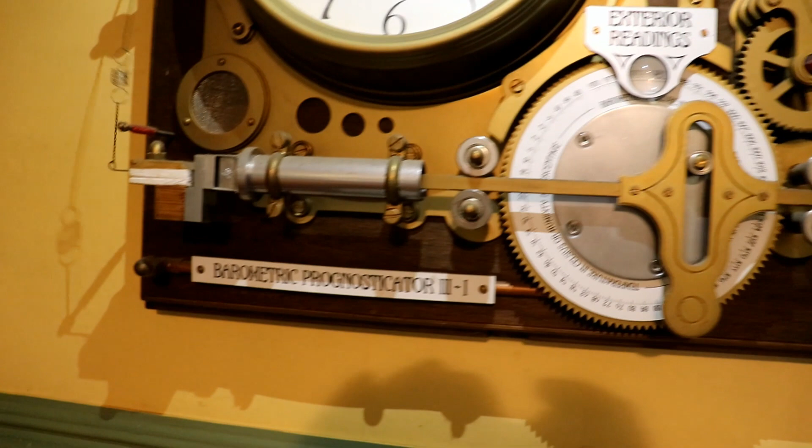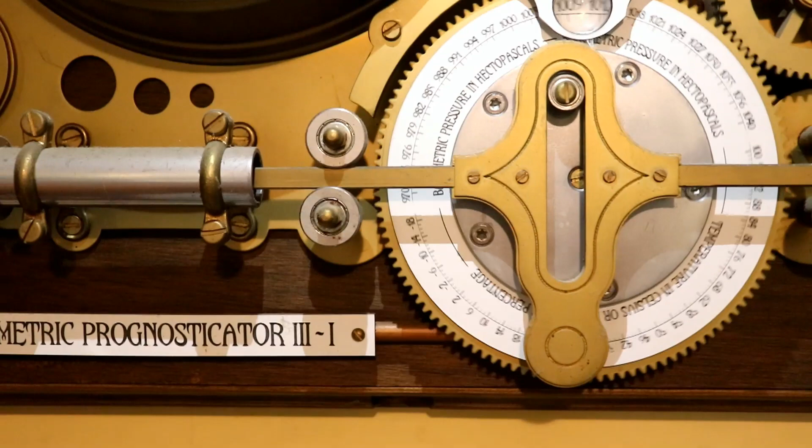Now, if you've watched this channel in the past, you'll know that so far on my machines I have used, well, the barometric prognosticator 3 was the first musical one. That has got a bell that rings to signal the hour changes, and when it's displaying readings, what reading it's actually displaying. It's also got the flute, the first flute, which was off a cuckoo clock. It uses the bellows from a cuckoo clock to make the wind, because obviously no cheating, Steamhead, no cheating. If you can have a sound, it has to be made for real.

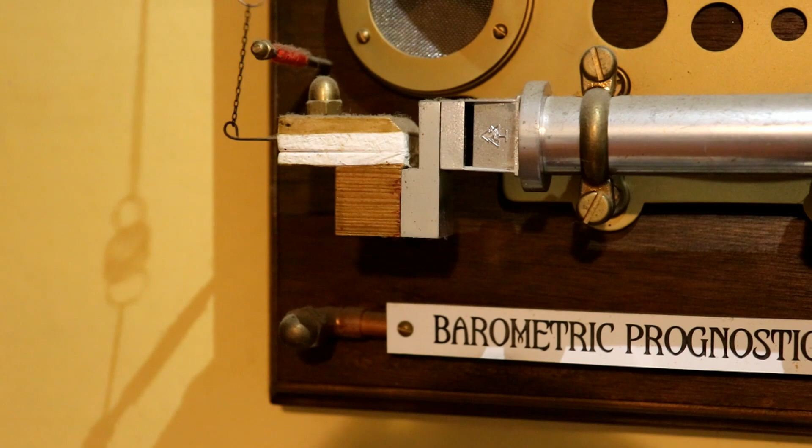And then it's got a Scotch yoke that pulls the sort of swanee whistle style mechanism in and out to set the pitch. And that works really nicely as it plays the weather forecast back to you audibly, musically, each hour or when required. You can actually hear how, for example, the humidity or the pressure or temperature has risen, fallen, whatever, throughout the last 24 hours. So, two instruments, bell and whistle.

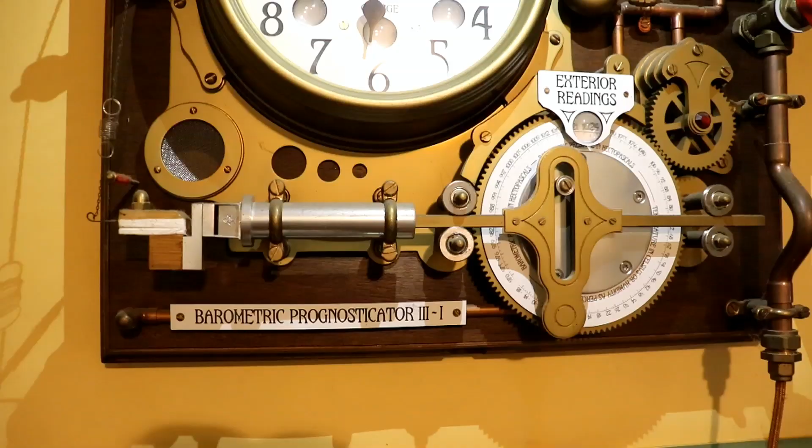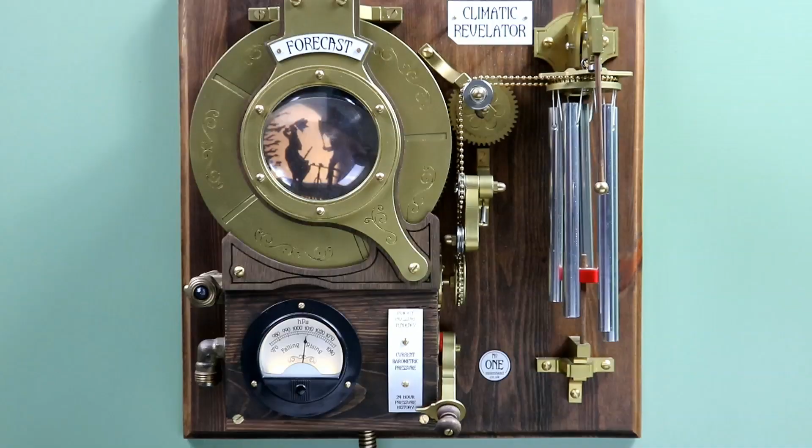And of course, who can forget, as I did this morning whilst walking the dog, there's the trumpet from the Net Throbwell, the heraldic clarion door horn, which is a sprayed up vuvuzela from a brilliant company in Spain. And there's the Climatic Revelator that displays the weather forecast by ringing chimes, a circular ring of chimes with a hammer, which is another good potential source of music.

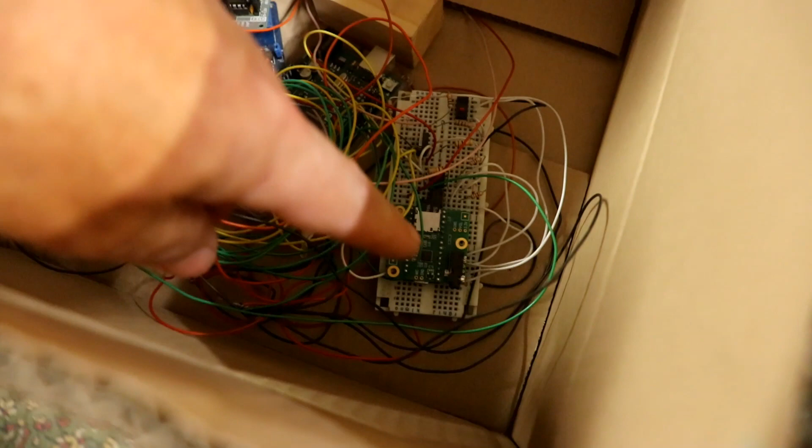And of course, there's Victoria the automaton. The other element in the music machine could be a singing automaton. There's no reason why Victoria couldn't sing, because having figured out the Teensy soundboard, which was amazing, and live filtering to make input sound have wow and flutter and crackles, there's no reason she can't sing, and that would be a lovely addition to any steampunk music machine.

So let's start this, and I'll stop filming myself. I'll just show you some of the sketches I did on holiday, some of the ideas that came to mind.

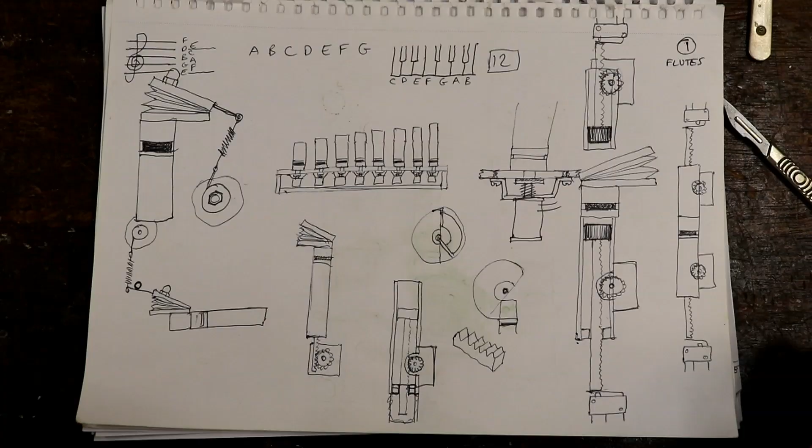So here's the first idea, thinking about keyboards and notes. There's some sort of representation of the one on the barometric prognosticator with the flute and the bellows, springs and motors.

Then getting inevitably more complicated, thinking possibly about having a row of them, rather like an organ, a church organ, with solenoids under each one, a valve, so that you can play lots of them together, which makes quite a lot of sense.

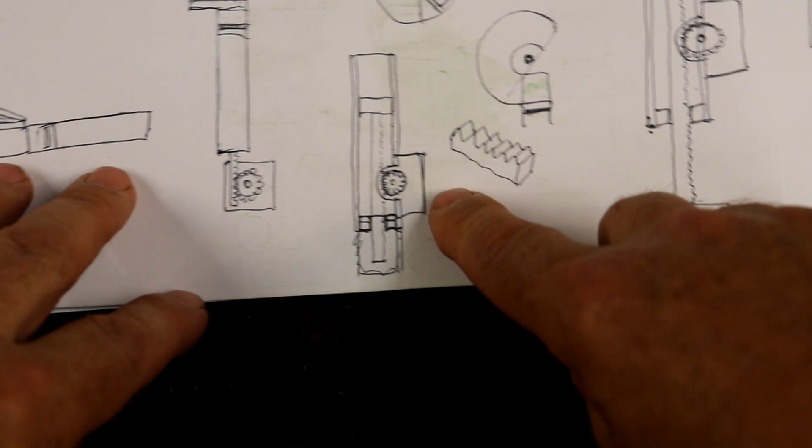And I was thinking, well, rather than having that Scotch yoke, you could have a plunger inside with a rack and pinion. Sounds like a good idea. Something along the lines of that.

Now, the great thing about that was, or is, if you had several of them, you could then be setting up the pitch on one while another one was playing.

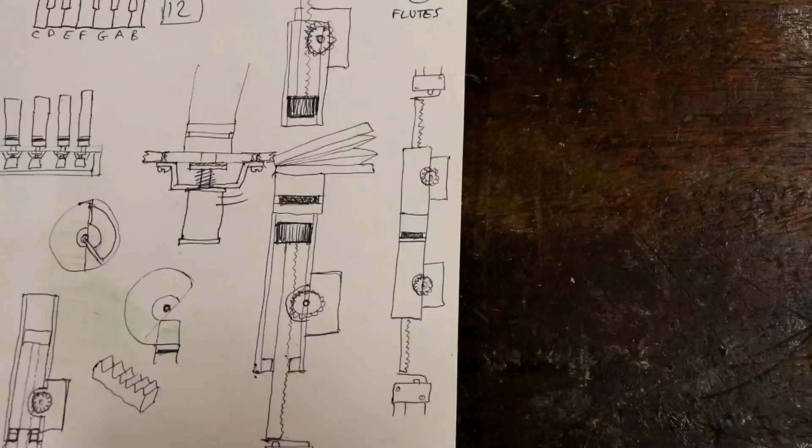And I was thinking, well, the other thing about bellows and flutes, here's one I didn't prepare at all. So there we are, beautiful little bellows and the flutes, they're all the same as far as I can see, because I bought lots of them.

The difference is in this wooden block, which has got a hole drilled up the middle, which sets the pitch. But I have noticed on the lower notes, on really big cuckoo clocks, these bellows are actually much larger because they need more air to make the notes.

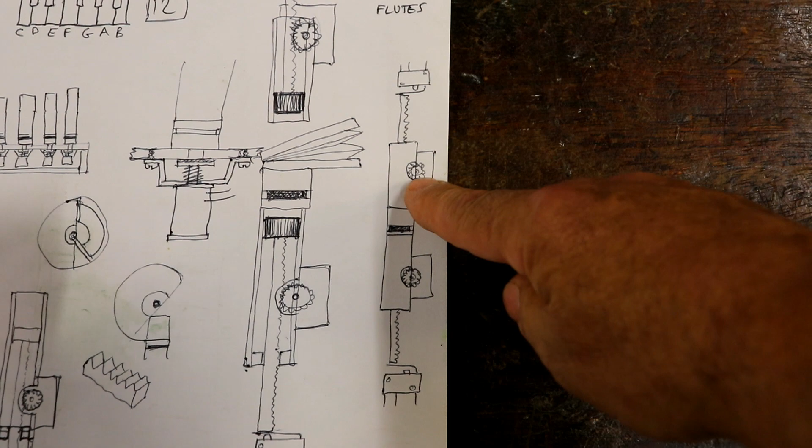So the thing is, if I had it like that, then I'm going to have adjustable bellows. And I thought, well, I can make bellows by having another motor driving down a plunger, a bit like a piston or something. So you have a motor at the top, a motor at the bottom.

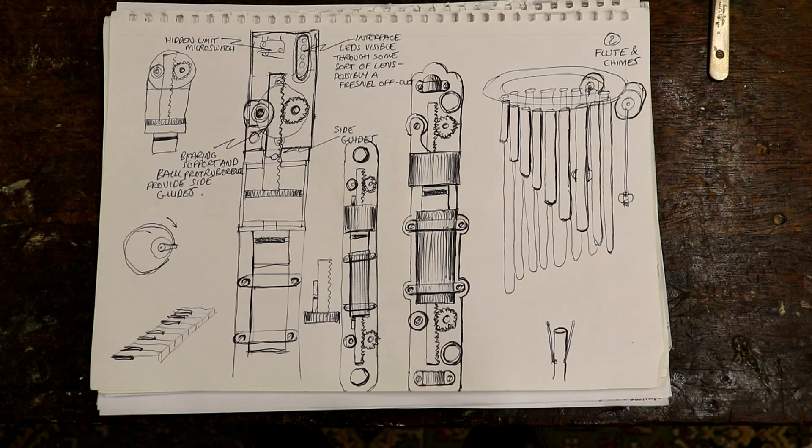The stepper motors I usually use, hold on a minute, these ones, which I've used in all the machines because they're brilliant. 5 volts. They come with an interface board that you just plug in, so you can connect it directly to something like an Arduino, which has a library you can use to control them.

And they're geared down a lot inside, so they're not fast, but they've got a lot of torque, very powerful, and very, very accurate - I think it's something like 2,000 or more steps per whole rotation. So very accurate, so they'd be very good.

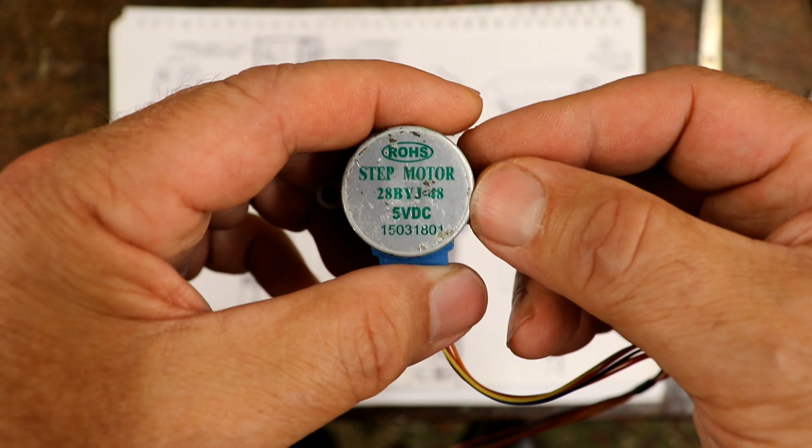And I always forget to read the number of these because people regularly ask. It is a 28BYJ48. There you go, recommend them.

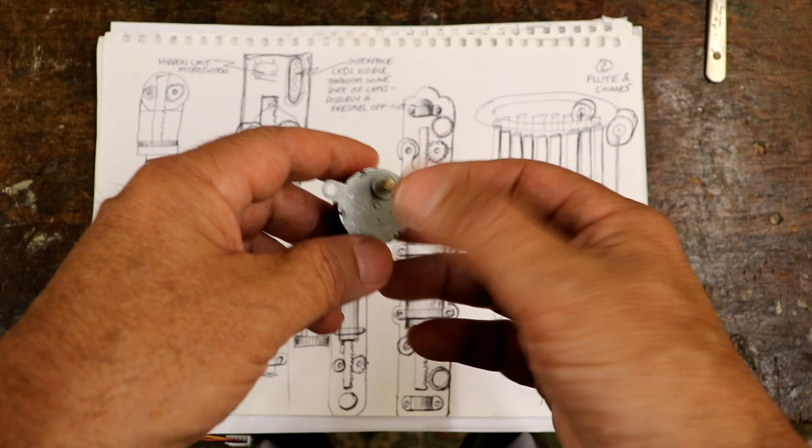They're slow though, so I was thinking, well, how slow? And when I got home, I looked it up because I hadn't got any internet access. They go maximum, I think it's about 4 seconds per revolution, which is about 15 RPM. Very slow, so I don't know whether that would work.

Oh, and I mentioned the chimes on the Revelator - the idea of having 2 hammers on motors, one inside, one outside, that can both turn independently, so they can be setting up the next notes while the last one's playing.

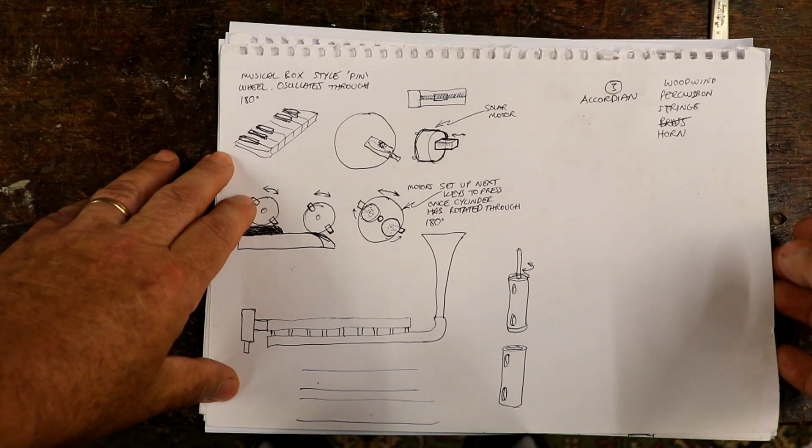Another idea, what was this? Oh, the accordion. I remembered I'd bought bits of an accordion, and I was thinking, how could you get a keyboard to be played without dozens of electromagnets? And I thought of an even more complicated way.

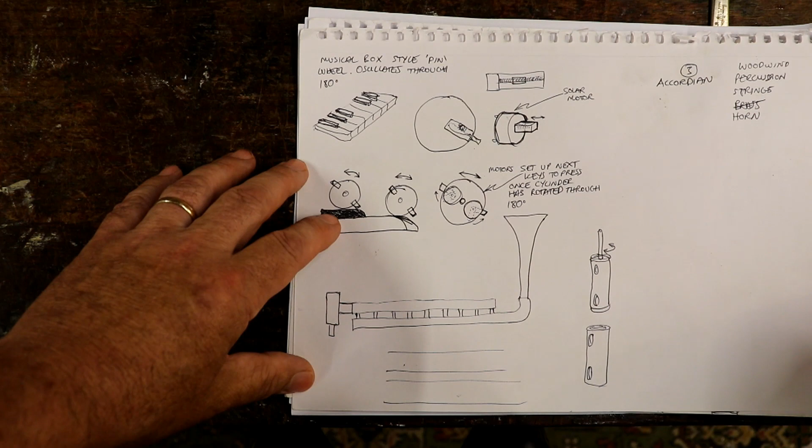You could have a cylinder with lots of little motors in that would throw out a pin, a bit like the works in these lovely little music boxes. We have a cylinder with these pins, and as it rotates, just need some oil, it plucks one of these little tuned things, whatever they're called. It's a bit like that.

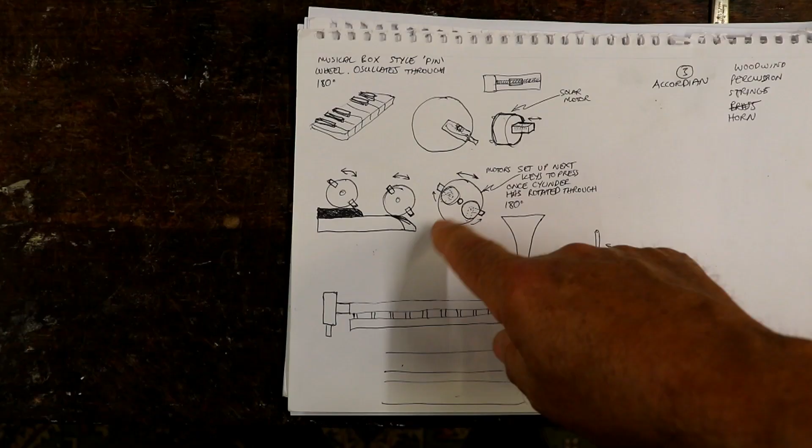With little motors, they flip out a pin. There'd be two lots of them, 180 degrees from each other, flipping out the pin. They'd roll round and engage with the keyboard, and meanwhile the other one would flip out or flip in, and you'd have a whole row of these, if you get my drift.

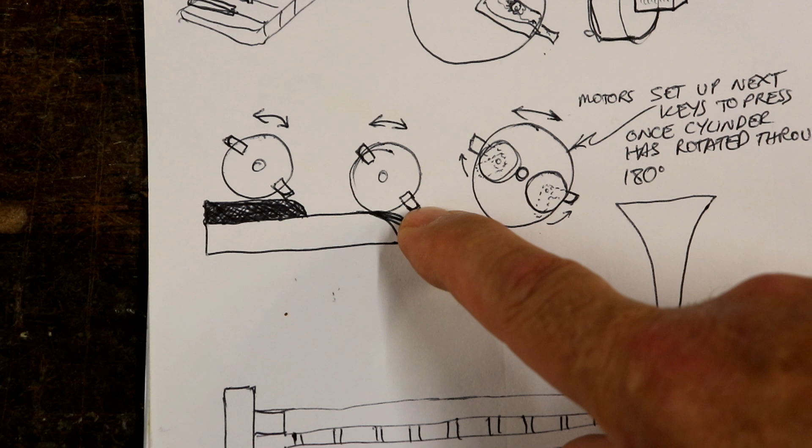The nice thing about it is that these pins can be on very, very small motors, because there's no effort needed there. The force to actually push the keys comes from the whole cylinder turning backwards and forwards.

When I got home and dug out the accordion I'd got, what did I discover? Keys, mechanical valves. But whoever sold it to me on eBay wanted to make as much money as possible, so they took out the reed boxes and sold them separately. So there goes that idea. Great shame, I'd still like to do something like that, but it's annoying.

This is where I became completely preoccupied with one of these - nicely in tune, a ukulele - because I remember my kids had got them and I thought that's really nice. All you need is some way of holding the strings down at the different fret positions, and some way of plucking the strings.

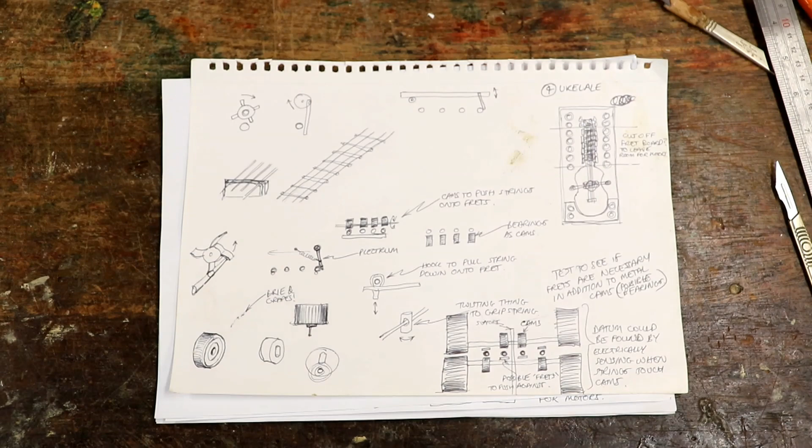What could be simpler? Well, three or four weeks later I can come up with quite a long list of what could be simpler. But I started off...

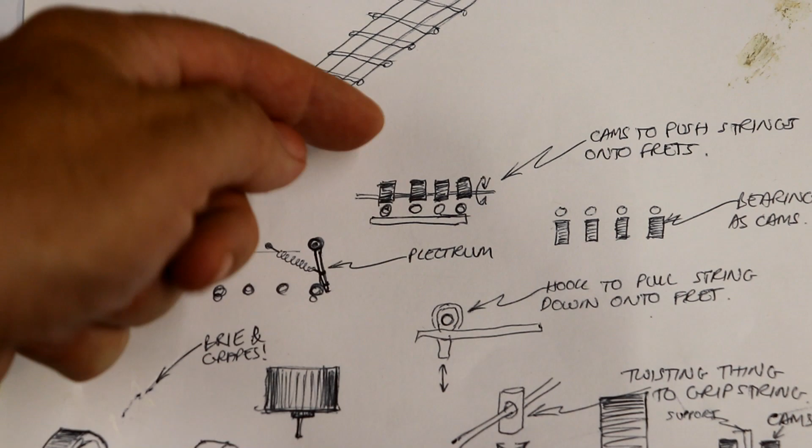thinking about having rows of bearings, eccentric ones that could come down onto the strings, like that for instance, and then you could have them all arranged nicely with the interfaces with the little motors under there. But of course those motors go slowly.

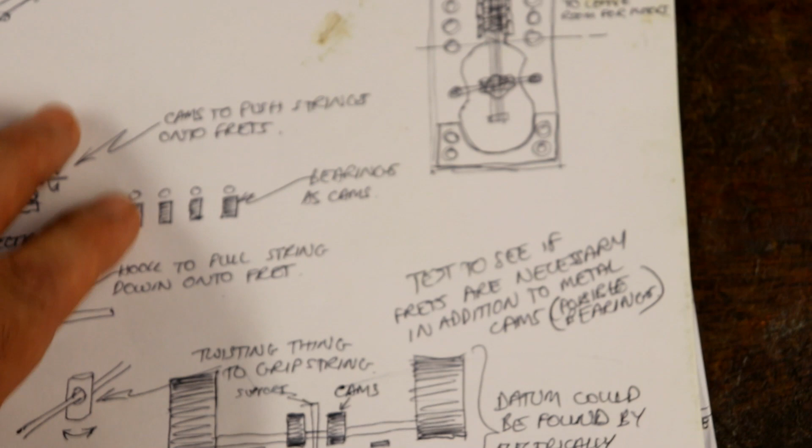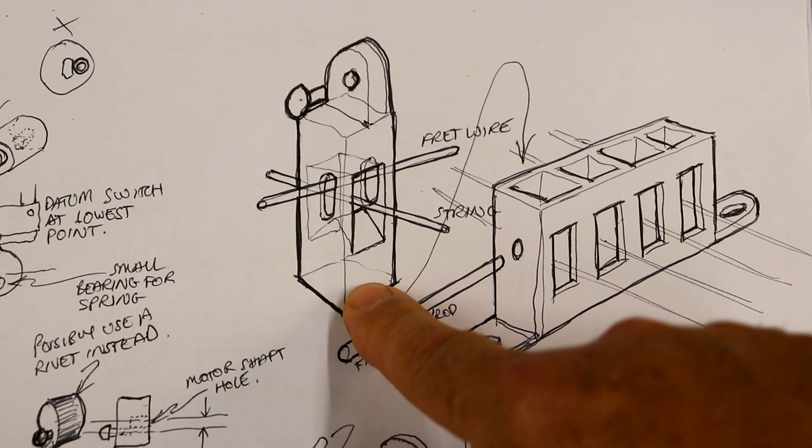Possible, those, possible. So then I thought, well, how about having individual little things or groups, clusters of things, with a big motor at the top - a stepper motor - on each one, and then have something inside that can lift up and down to hold the string against a sort of built-in fret.

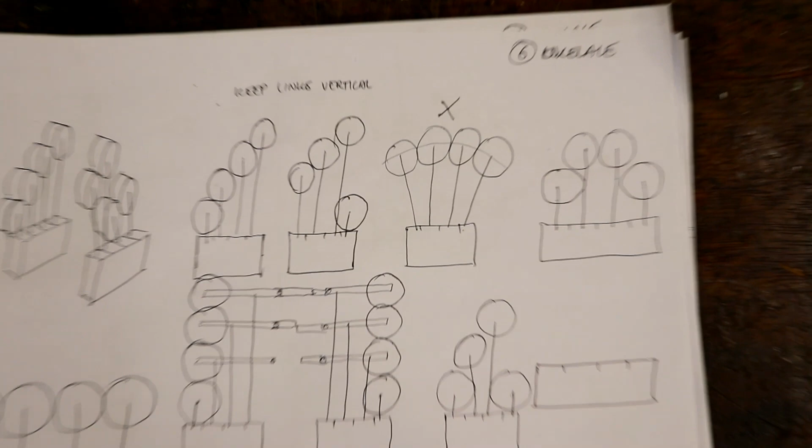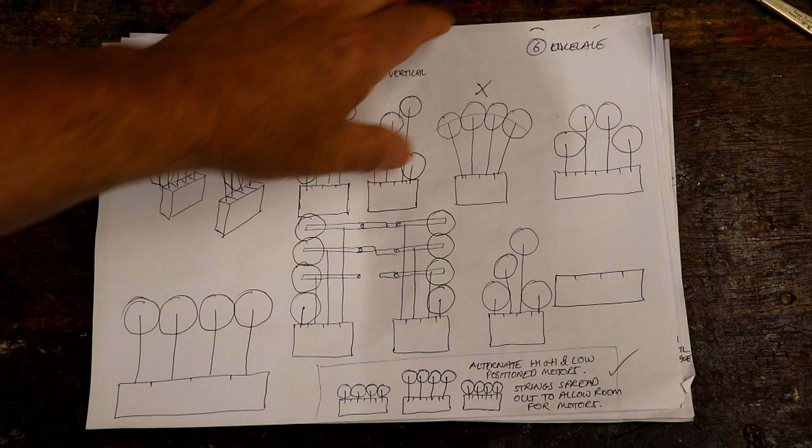That could potentially work. This is the problem with design - it's a curse and it's a joy, because the curse is there are so many ways of achieving something, not just one way. There inevitably will be the best way that someone can think of doing it at the time.

But then the joy is that you can sit on a beach listening to the sea and the waves, and just imagine in your head a multitude of different ways of achieving the same thing.

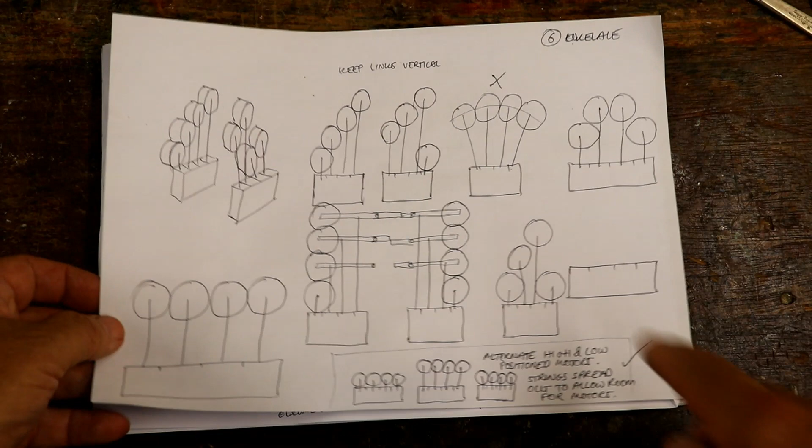So, trying to work out how to fix a load of these motors, enough for each of those frets, that really ruled that out. It's another nice idea for how you could achieve something else, which I can't even remember.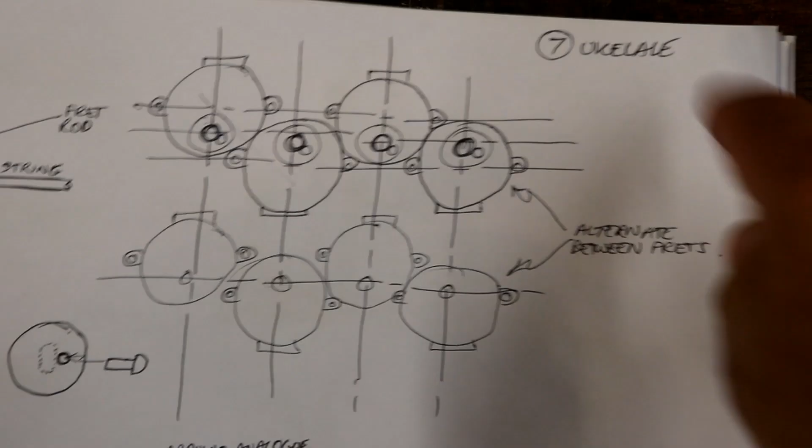Oh, and then, if the strings were wire - and you can, because I looked it up, get wire strings for a ukulele. I can't spell ukulele, I spelt it differently on each sheet, just hoping I'd finally get the right spelling.

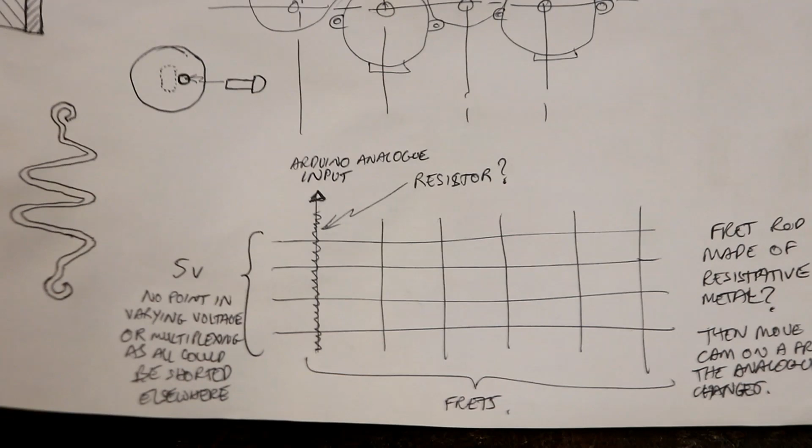But you could have the frets made of some resistive metal, or even have little gold-plated loops under each one, and then the strings, if they were metal, you could tell when each string was actually touching the right fret. Oh, it just drove me to distraction.

And then other ways - Bowden cables like you have on bike brakes. There's no end to it. More ideas. And then this is the final one.

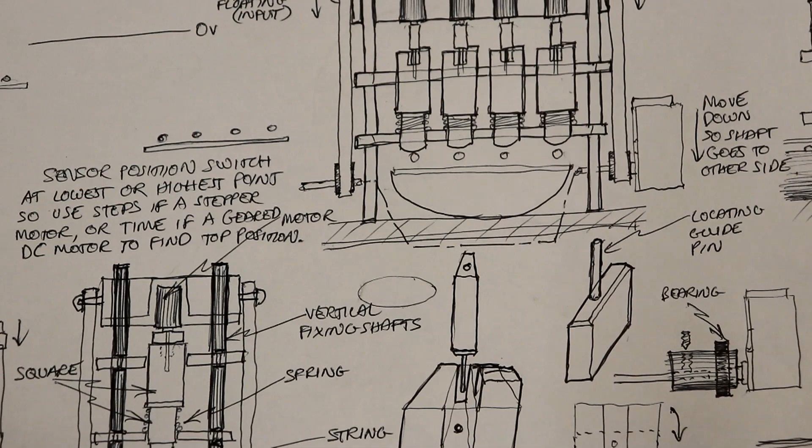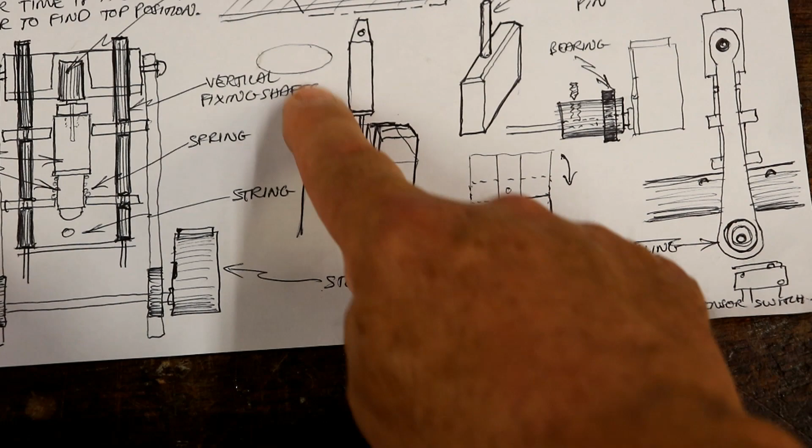That's it. The last idea I came up with was having four of the titchy little motors, a bit like that idea with the accordion, that could spin round little pieces of plastic that could be 3D printed, and they could then push down, engage, if you will, a bit like that. If they're lined up that way, they'd push down into the slot. If they're 90 degrees, they'd push this whole thing down, with a little row of springs. And then the whole of this assembly could be pulled up and down with one of the small motors.

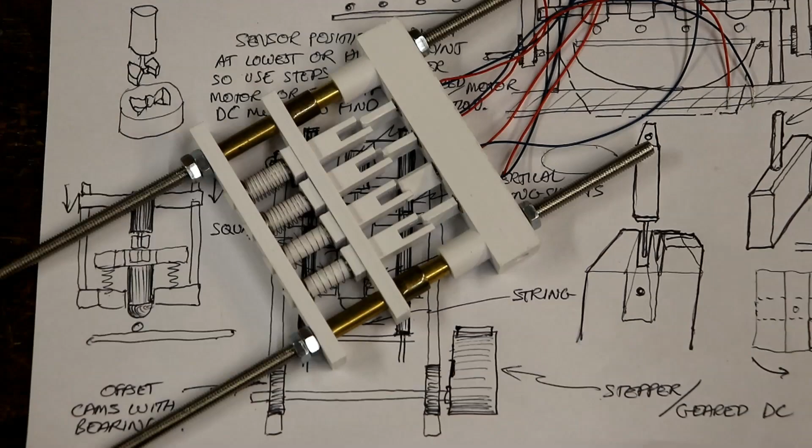So, with the benefit of hindsight, something very much like that. I finally summoned the enthusiasm to actually start making this.

Now you can see what I mean. I found these incredibly small motors, and I assure you my hands haven't grown enormously. They are, what do they call it, coreless motors I seem to remember. I didn't even know they existed.

You have a permanent magnet in the centre, and an epoxy-held complicated coil around the outside. That's why they're used on drones and things - there's so little momentum or inertia needed in the bit that spins round that they can go incredibly fast. Now, I don't want them to go fast, I just want them to turn, but the idea is they can flip something backwards and forwards really quickly.

So there are 4 of those fixed into here that can flip these little bits like that, or like that. Because of the design of the top of these parts - I haven't come up with any names for them yet - these are captive, so you flip that as far round, say clockwise, as possible. It can't go any further. It means that when you lower this, it doesn't engage. See what I mean? But if you flip it through 90 degrees, it's going to push that down.

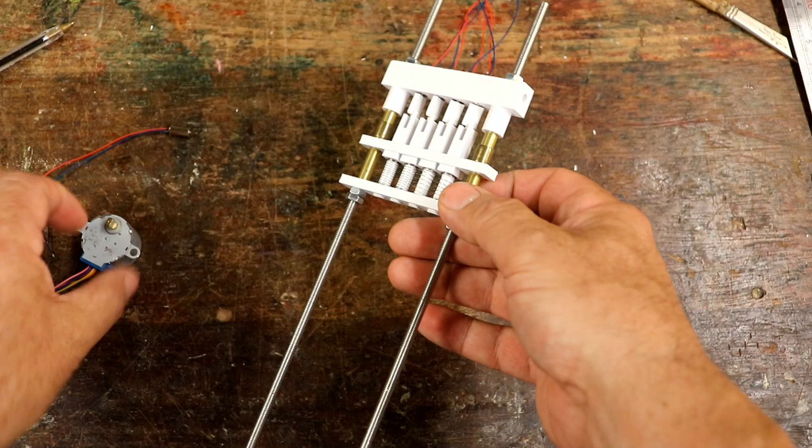Yes, it could work. Yes, it ticks the overcomplicated way of achieving things with steampunk. But, don't know, tell me what you think. I'd love to know - should I pursue this idea?

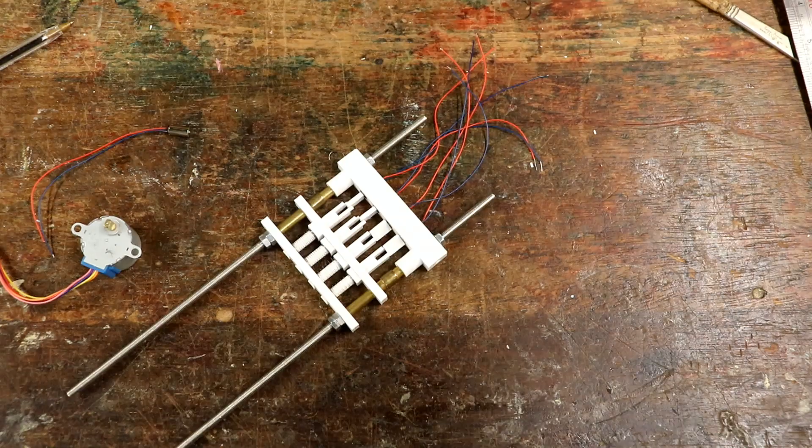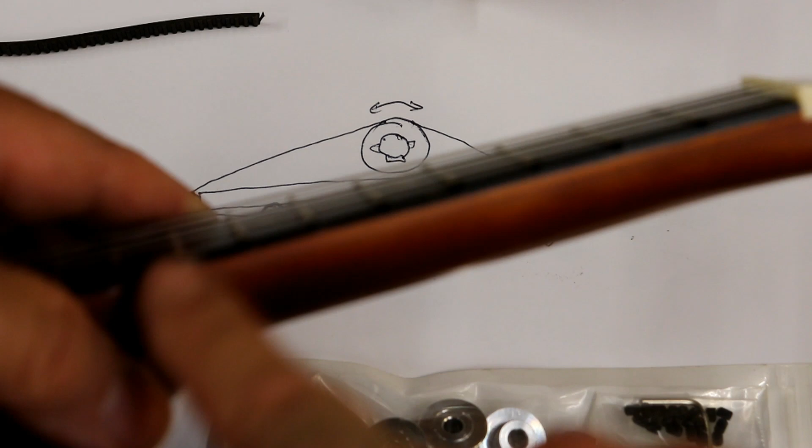Because this morning I came up with yet another idea. Forgive the high quality rendition, but this is the realisation. There's the side of the ukulele, that's this bit with the frets up there and the strings. You could have a roller, possibly with a rubber shield on the outside, a rubber tyre, and that can roll up and down these. Because it's rubber, it will sort of lift over each of the metal fret things, which would be great.

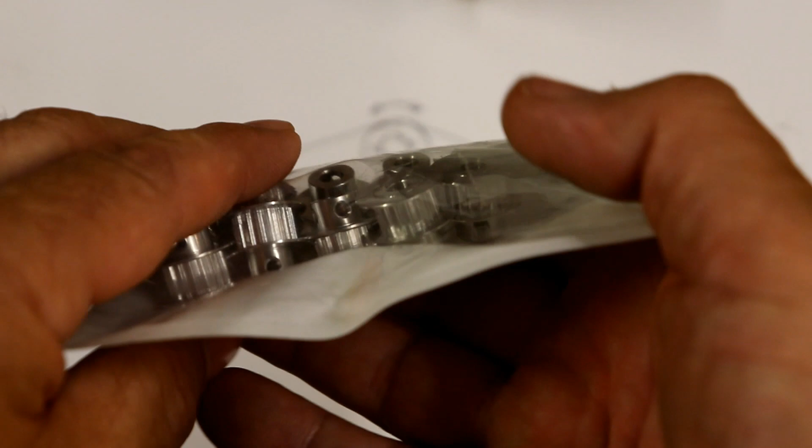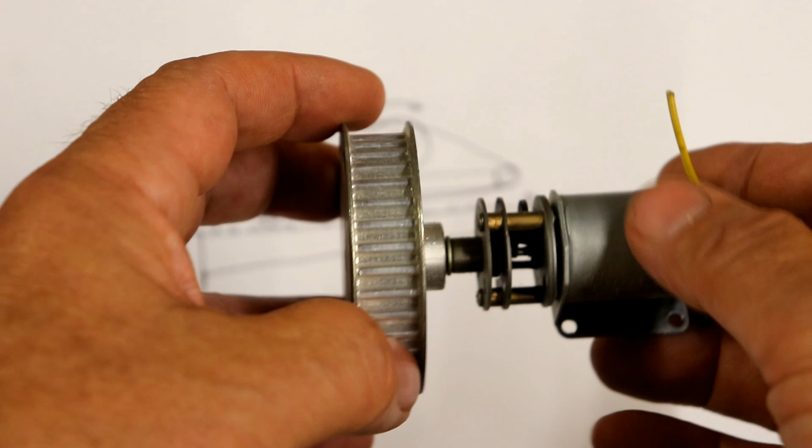And it could be driven and pulled by some of this wonderful stuff I've had sitting around for ages - toothed rubber drive belt stuff. They use it on loads of CNC machines, as I'll show you in a minute. I've even got a packet of these toothed pulleys - this one's the wrong pitch, but you can get lots of different types of tooth pulleys, so it could drive it really nicely like that. Join the ends on some sort of saddle or cradle here, and have some tensioner there.

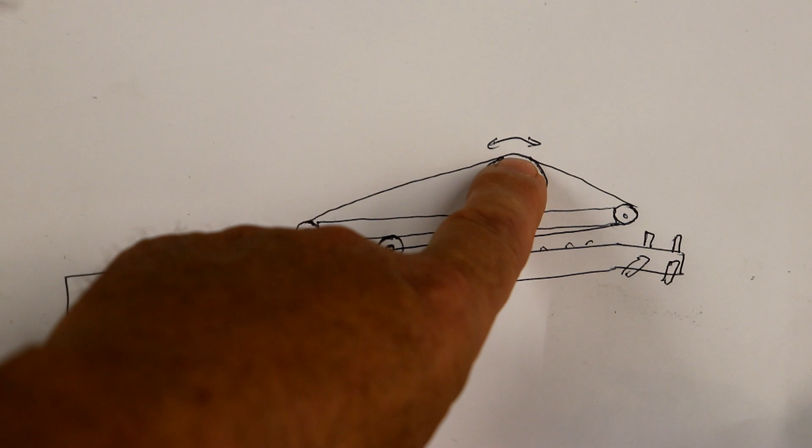That's the usual way they do it. And then that could drive that backwards and forwards really quickly. Have it narrow, have 4 of them in line. So that's my current thinking.

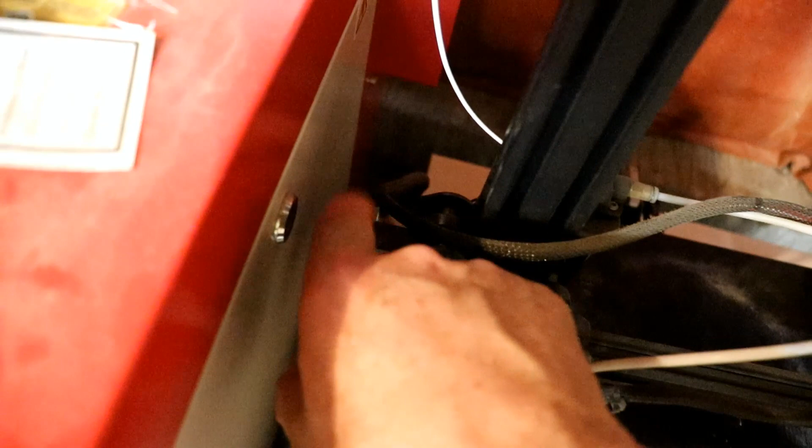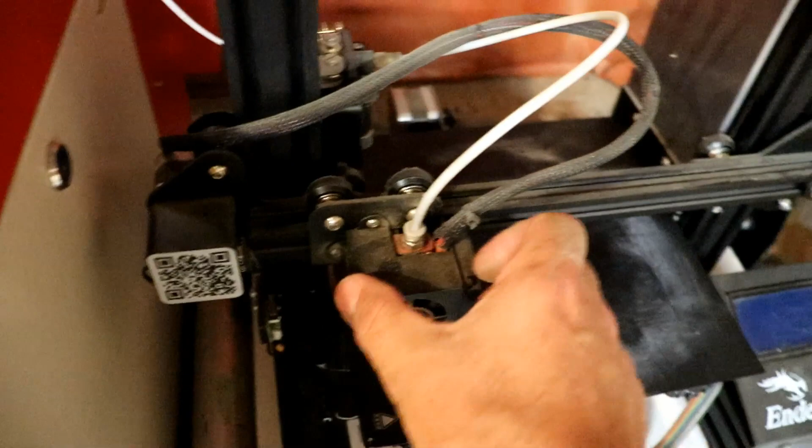It's how my lovely 3D printer works. Back here - apologies for the darkness, it's stuck in the corner - there's a stepper motor, one of those NEMA ones, more powerful and no gears. That drives one of those rubber belts, you just see it down there. It goes round the end, tensioner, and then back to the cradle bit that can go across. It's got 3 wheels that run in indented surfaces.

So something like that, but without a print nozzle on it - just a little bung, something to push on the strings, and a limit switch as well. Very similar to that, in fact.